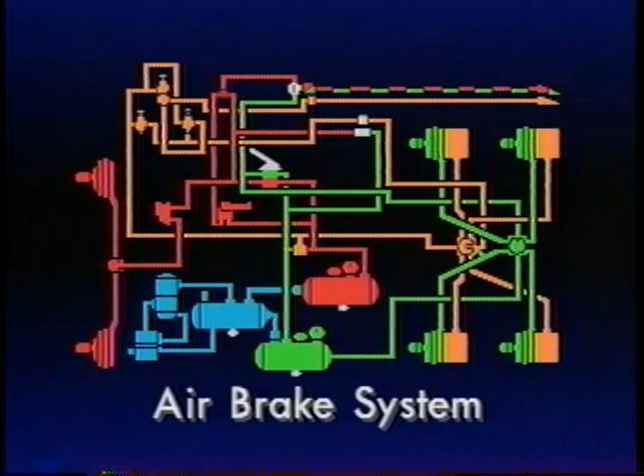No matter what your business is, whether it's hauling materials on high-speed interstates, navigating busy city expressways, or transporting the most valuable cargo of all, people, on crowded city streets, it is your equipment that you rely on to get the job done effectively and safely. It's hard to imagine a more vital part of safe, reliable operation than the air brake systems, and that's what this presentation is all about.

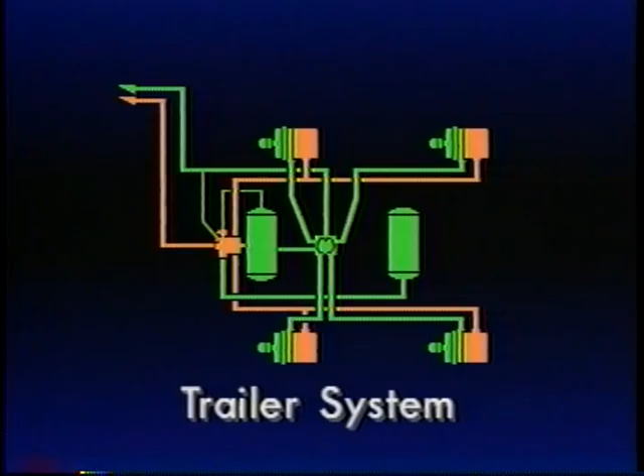A typical air brake system can be divided into several distinct parts: the supply system, the front and rear service systems, and finally, the trailer. This presentation is the first of a four-part series and deals with the operation and maintenance of the air supply system. During the program, we'll point out areas of maintenance concern.

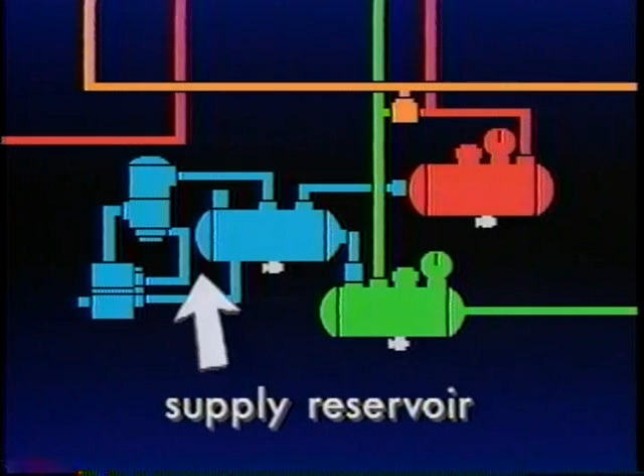Although brake systems and components may vary from vehicle to vehicle, the air supply system, shown here in blue, is basic to all. The major components are the air compressor, supply, front axle, and rear axle service reservoirs, governor, and air dryer.

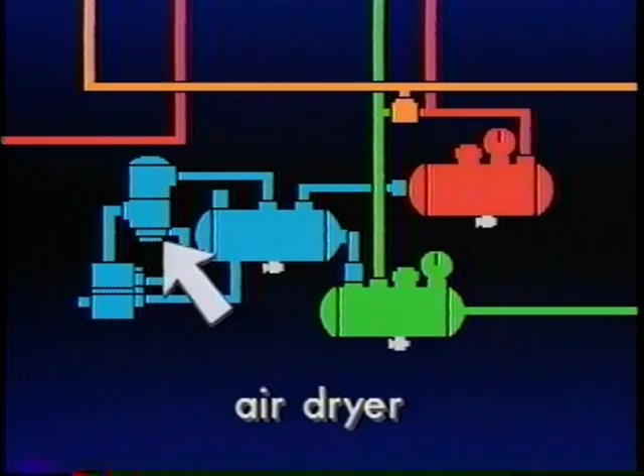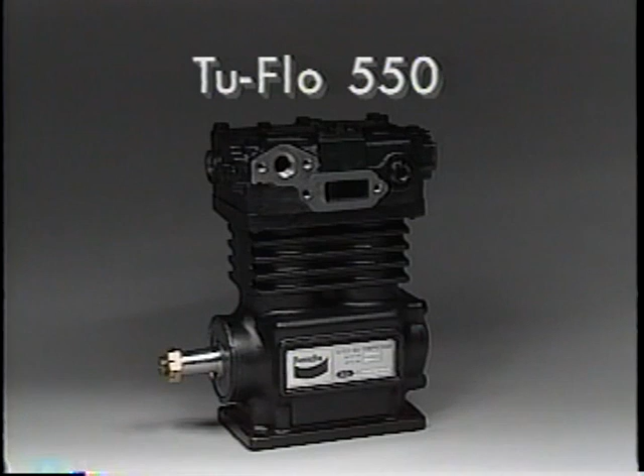The primary component of the supply circuit is an air compressor, such as this Bendix Tu-Flo 550. Powered by the vehicle's engine, the air compressor converts atmospheric air into compressed air, energy needed to power the vehicle's brakes. The compressor components we focus on during this presentation are the crankshaft,

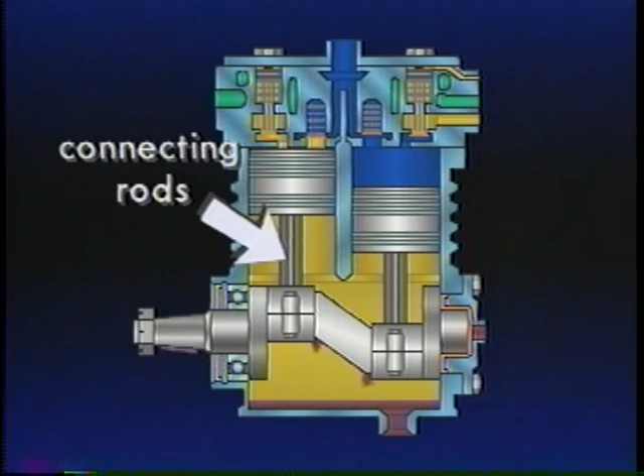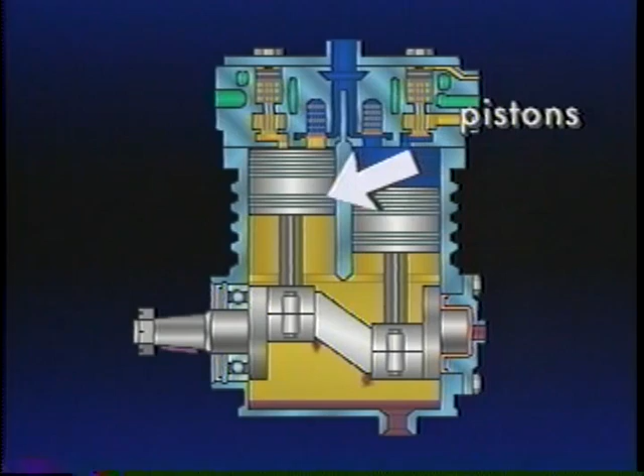connecting rods, rear end cover, rear main bearing journal, pistons, cylinder bore, inlet valve, discharge valve, and discharge port.

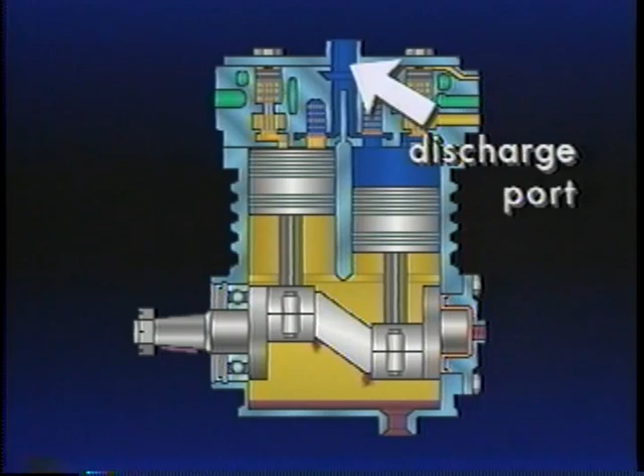The compressor crankshaft and connecting rods convert the rotational force of the engine to a vertical linear force in the compressor pistons. The compressor is lubricated by pressurized engine oil, which in this case enters the rear end cover, flows to the rear main bearing journal, and through a passage in the crankshaft to the connecting rod bearings.

Oil that escapes from around the bearings falls to the bottom of the crankcase and is returned to the engine. This oil return is important because it prevents crankcase flooding, which results in compressor oil passing.

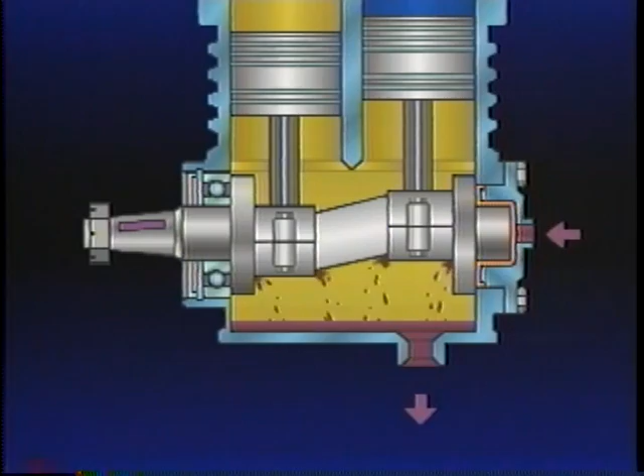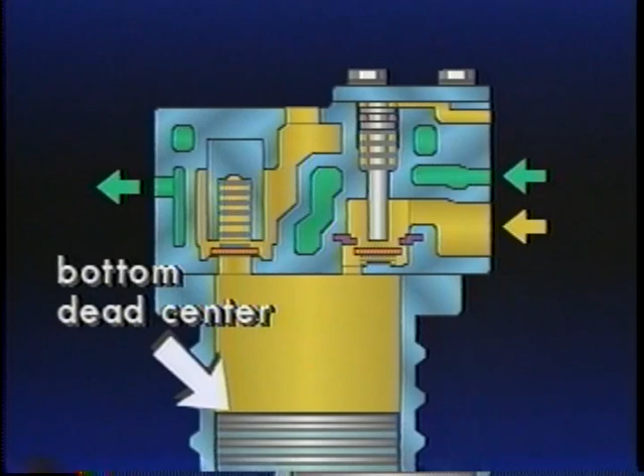Let's take a look at the air compressor from a front view, revealing a single piston only. During the intake stroke, a slight vacuum is created above the piston in the cylinder bore, causing the inlet valve to open and move from its seat. Filtered atmospheric air flows into the bore until the piston reaches bottom dead center and begins to reverse its travel.

As the piston begins its compression stroke, the inlet valve closes, and the air in the cylinder bore is compressed as the piston approaches top dead center. During air compression, the discharge valve opens, allowing compressed air to flow from the cylinder bore past the open valve and out the discharge port into the supply reservoir.

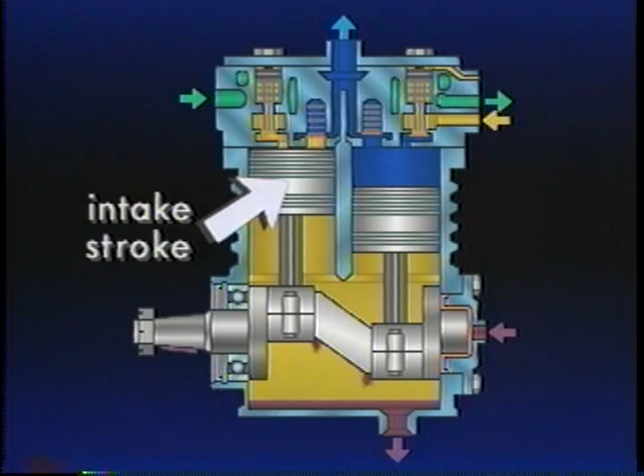Returning to our full cutaway view of the compressor, we find that since the compressor contains two cylinders and the crankshaft has 180-degree opposed journals, one piston will be on its intake stroke while the other is compressing, building to maximum pressure. While this is occurring, a constant flow of engine coolant is routed through the cylinder head cavities to dissipate the heat generated by the compressor during air compression.

Rapid buildup of air pressure depends upon proper opening, closing, and sealing of both the inlet and discharge valving and unobstructed flow of air in the cylinder bores.

Check for any restrictions to the flow of atmospheric air into the cylinder bore or the compressor discharge line leading to the supply reservoir. The obstruction of atmospheric airflow into the cylinder bore will cause the vacuum above the piston to draw oil past the piston rings, resulting in oil passing.

An obstruction in the compressor discharge line leading to the supply reservoir will cause the compressor to run hot, build carbon deposits, and pass oil despite adequate coolant flow.

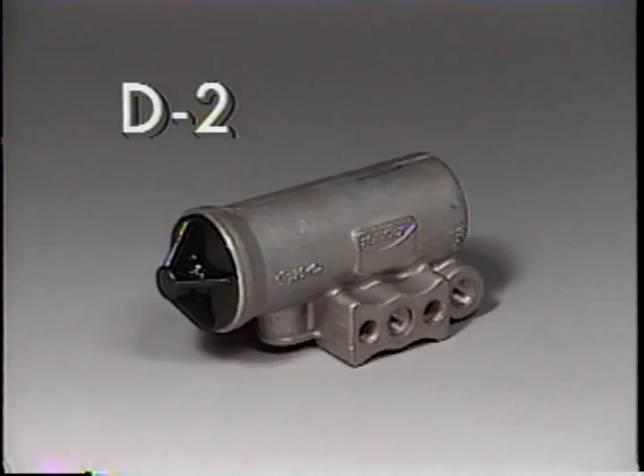Next, let's look at the Bendix D2 governor and how it interacts with the compressor and supply reservoir and later the air dryer. The governor is used to control the compressor and thereby regulate air pressure in the supply reservoir.

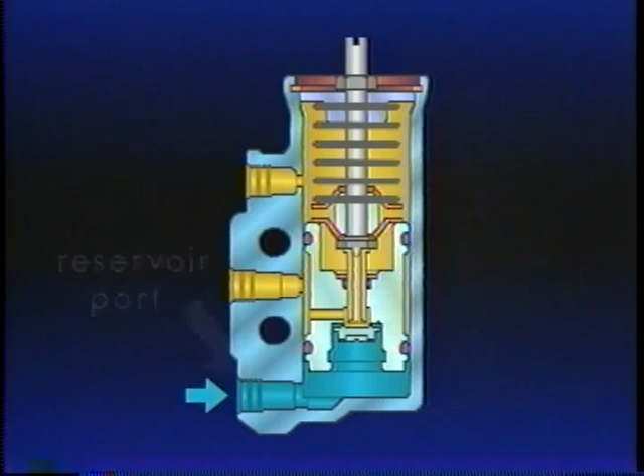The governor's main components are the reservoir port, piston, inlet exhaust valve, pressure setting spring, and governor unloading port.

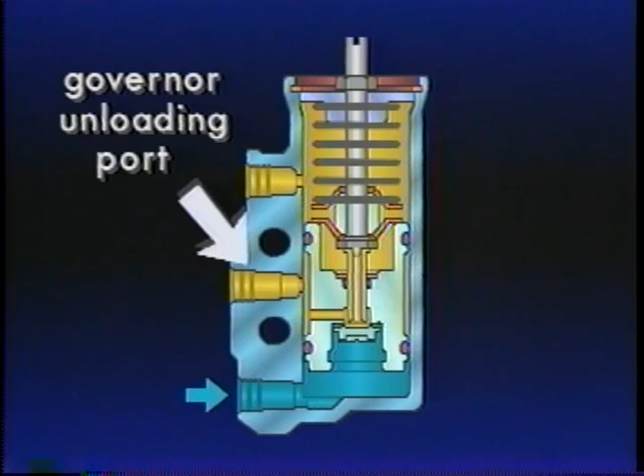An air line connects the governor to the supply reservoir. Reservoir air enters the governor at its reservoir port. As air from the compressor builds reservoir pressure, the governor's piston and valve move together against the resistance of the pressure setting spring. When reservoir pressure reaches the cutout setting of the governor, typically 120 psi, the piston will have moved sufficiently to seal the exhaust and open the inlet.

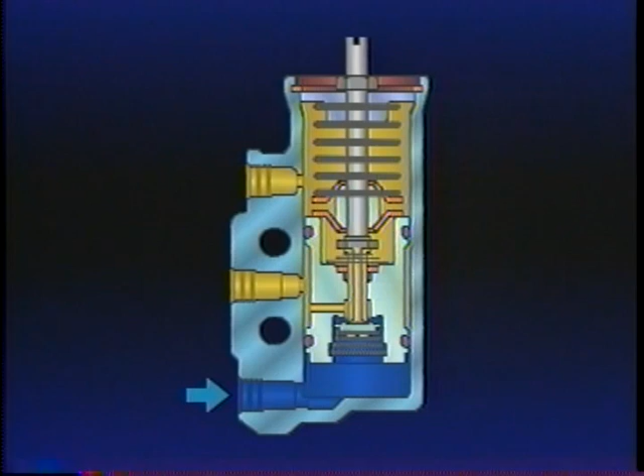Reservoir pressure flows past the inlet, through a passage in the piston, and out the governor unloader port to the compressor unloader mechanism.

Air from the governor enters the compressor and acts upon the unloader pistons, which move and hold the compressor inlet valves off their seats.

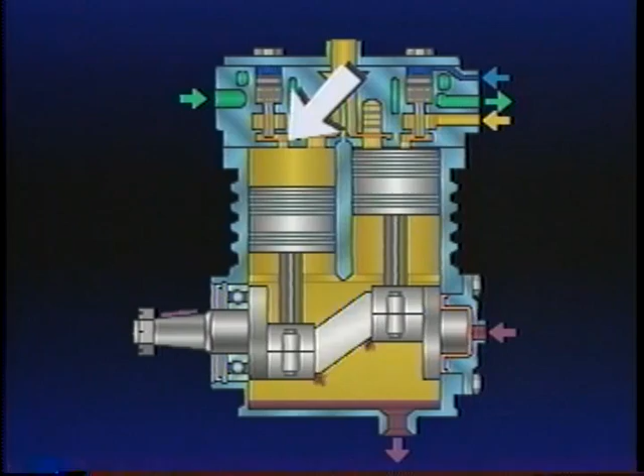With the compressor unloaders pressurized, air enters and leaves the cylinder bores through the open inlets, and air compression ceases. Because the pistons are 180 degrees opposed, air is shuttled from one cylinder to the other as the pistons move up and down.

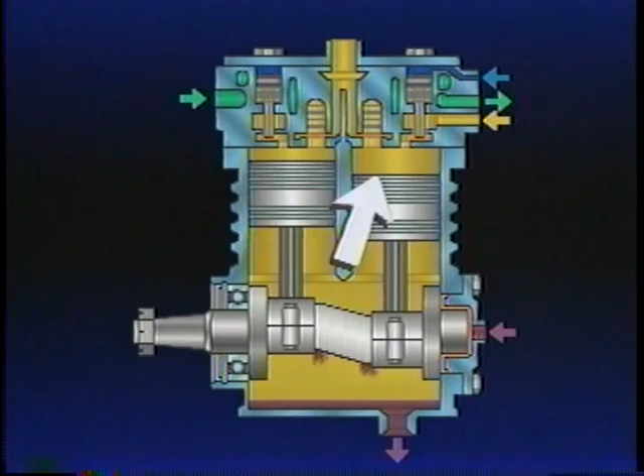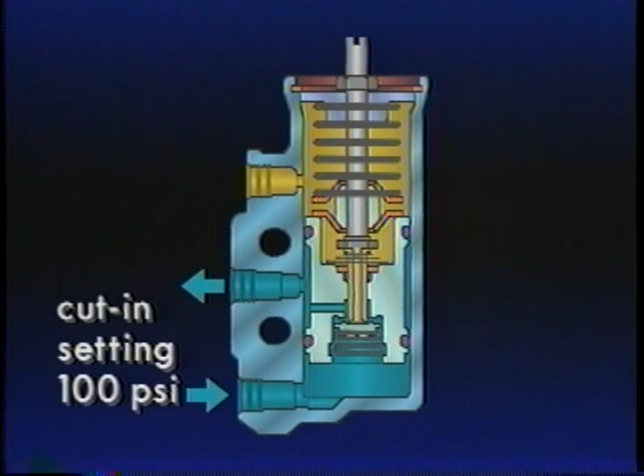When supply reservoir pressure drops to the cut-in pressure of the governor, typically 100 psi, the governor pressure setting spring moves the piston, closing the inlet and opening the exhaust.

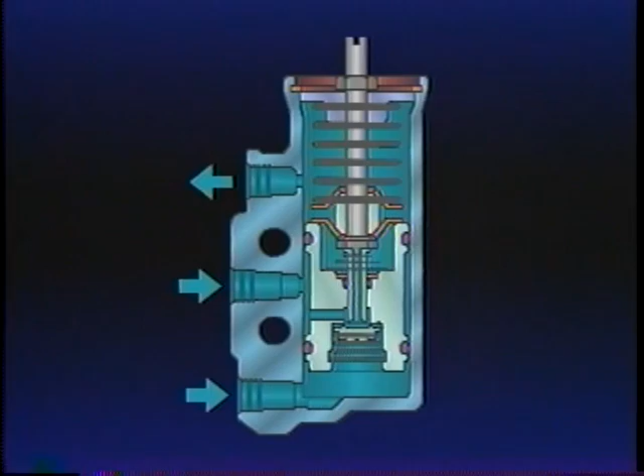Air in the compressor unloader mechanism flows back to the governor and is exhausted. With air pressure removed, springs move the unloader pistons, allowing the inlet valves to return to their seats, and compression of air resumes.

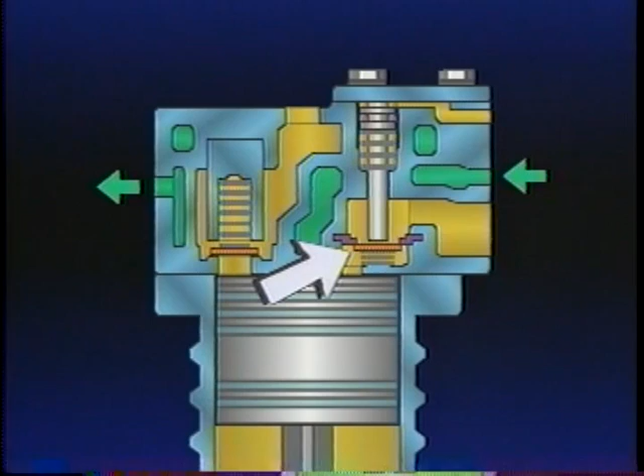Here's a service tip. Make sure the air line between the supply reservoir and governor is unrestricted. Otherwise, the governor's function will be impaired.

If either the governor or compressor unloader mechanism fail to function, the compressor would continue to compress air.

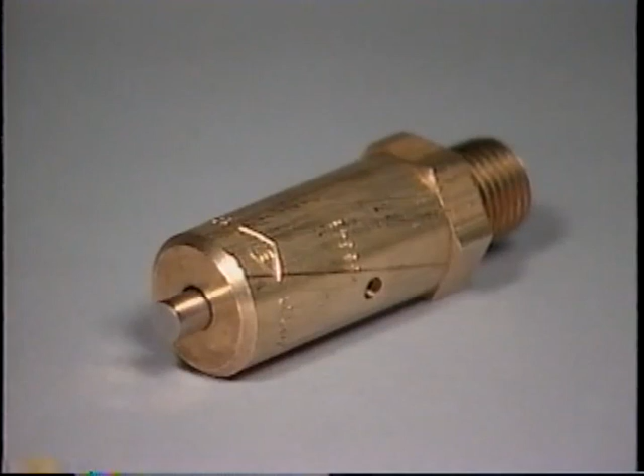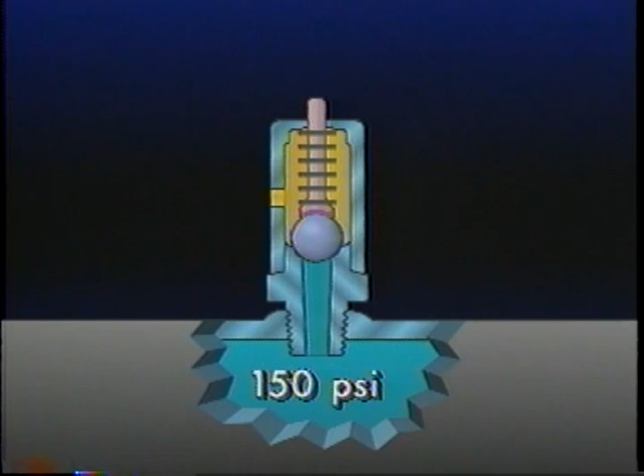To protect the air systems against a failure of either the governor or compressor unloader mechanism, a safety valve like the Bendix ST3 is installed on the supply reservoir or air dryer if the vehicle is so equipped. Generally set to open at 150 psi, the safety valve employs a spring-loaded stem resting on a seated ball valve.

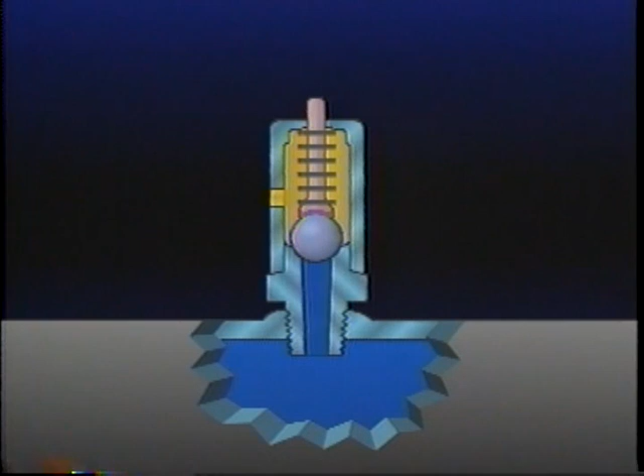When reservoir pressure exceeds the valve setting of 150 psi, the ball moves off its seat and air is exhausted through the exhaust port.

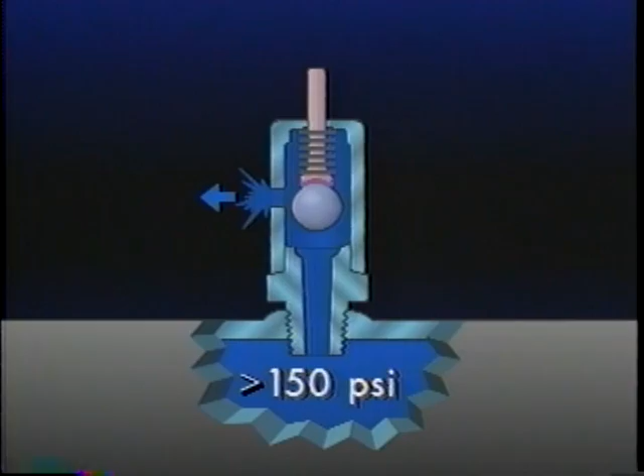The safety valve should be checked periodically by pulling the exposed stem. Air should escape when the stem is pulled and cease when released.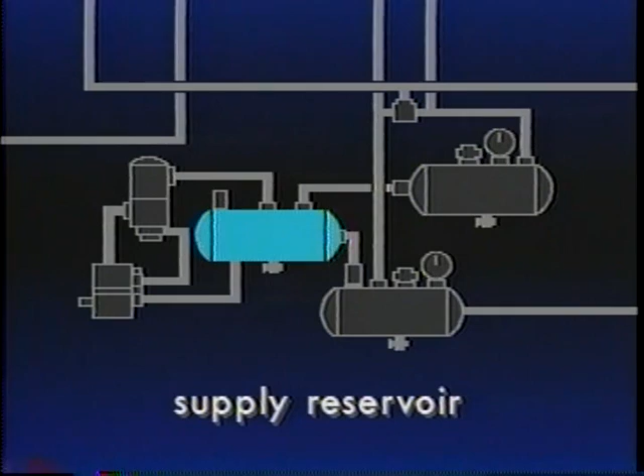A dual circuit brake system generally consists of a minimum of three reservoirs: the supply reservoir, the front axle service reservoir, and the rear axle service reservoir.

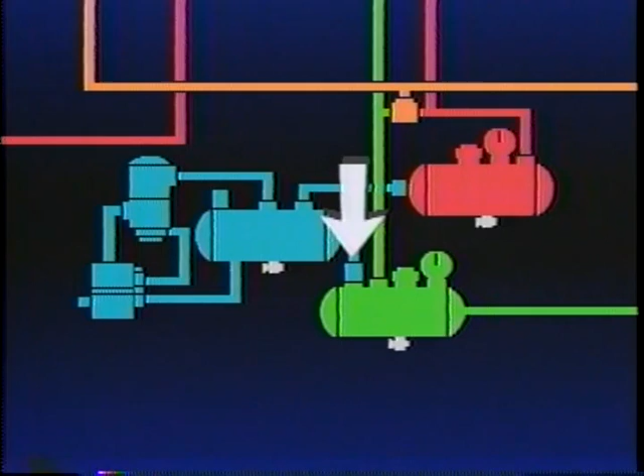The service reservoirs supply both the front and rear axle brake circuits. Air from the supply reservoir flows through single check valves to fill, protect, and separate the service reservoirs from each other.

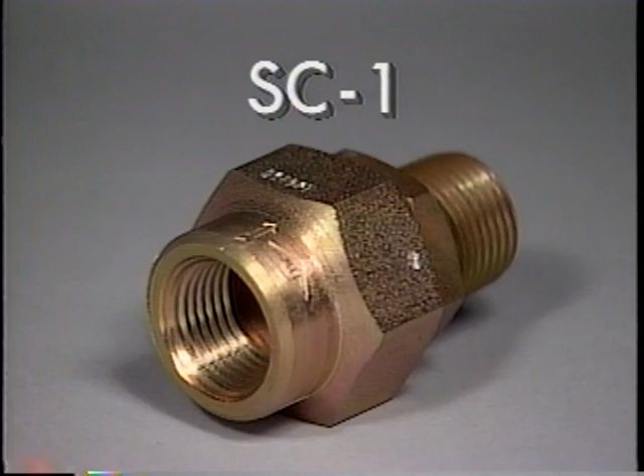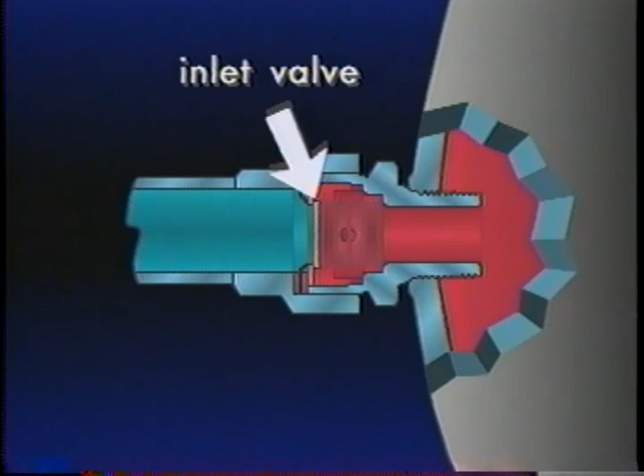The Bendix SC1 single check valve allows air to flow in one direction only. The Bendix SC1 consists of a supply inlet port, inlet valve, spring, valve seat, and delivery port.

Supply reservoir air pressure overcomes a light spring force to move the valve off its seat, allowing air to pass through the valve into the service reservoir.

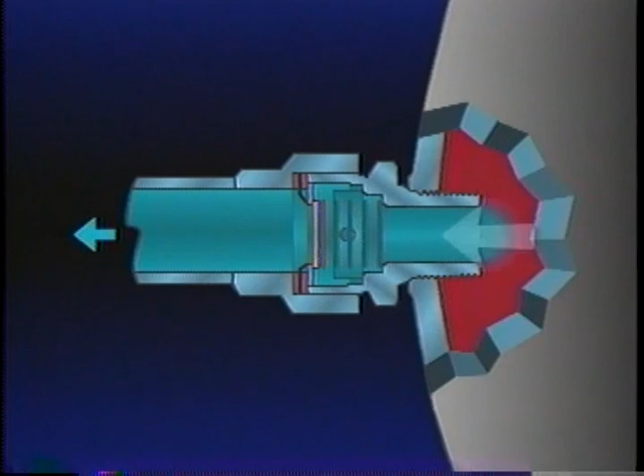If the supply reservoir air pressure is lowered for any reason, the check valve closes and prevents service reservoir air from flowing back into the supply reservoir.

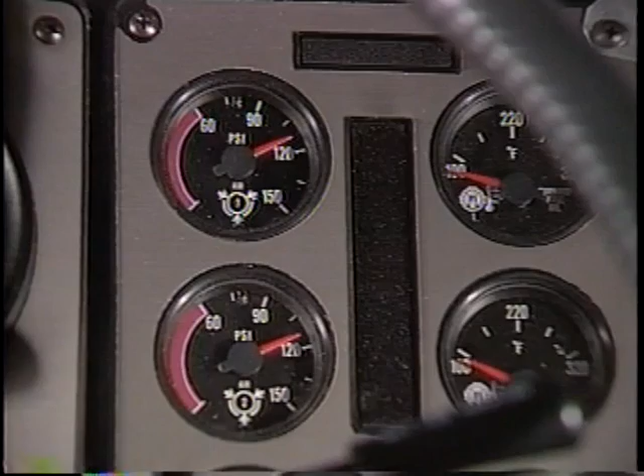As required by federal regulation, braking pressure for each service reservoir is registered on a dash-mounted air pressure gauge or gauges. A low-pressure indicator switch, such as the Bendix LP3, is installed on both service reservoirs.

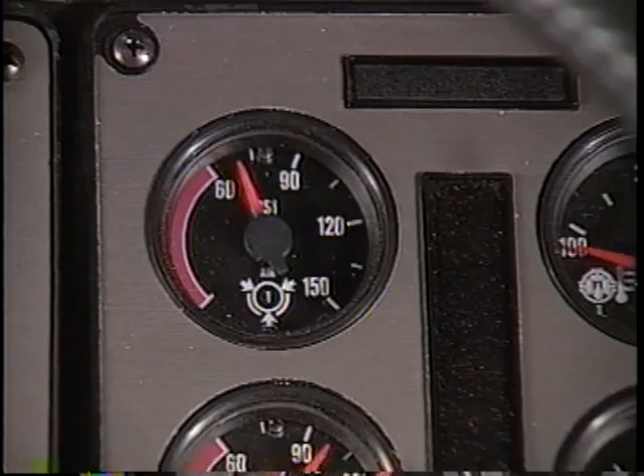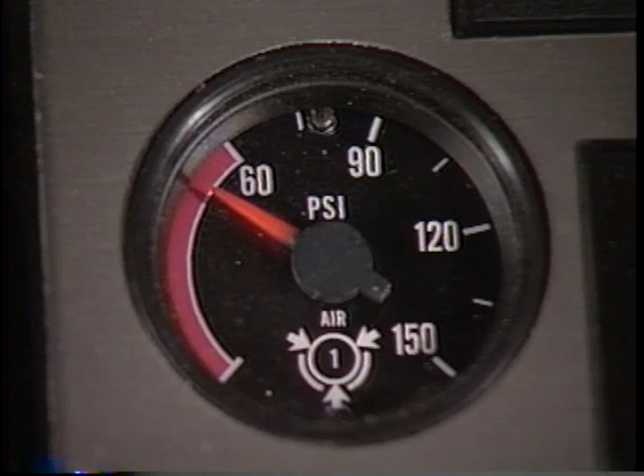Also required by regulation, the LP3 activates a visual warning, generally a dash-mounted warning light and a buzzer, when reservoir pressure falls below a safe minimum, typically 60 psi.

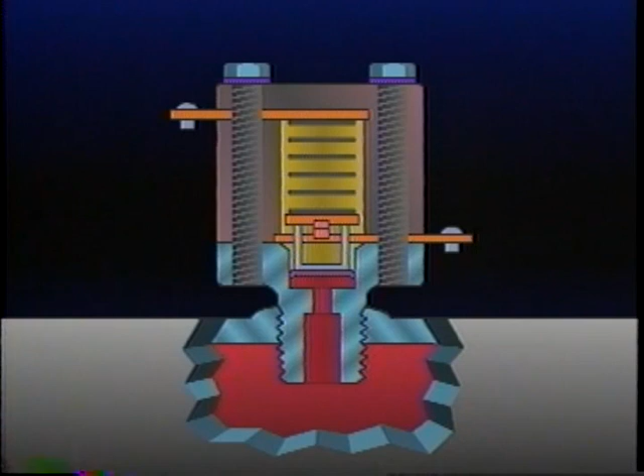Electrical contacts in the low-pressure indicator switch close. They remain closed until reservoir pressure rises approximately 15 psi above its safe minimum setting.

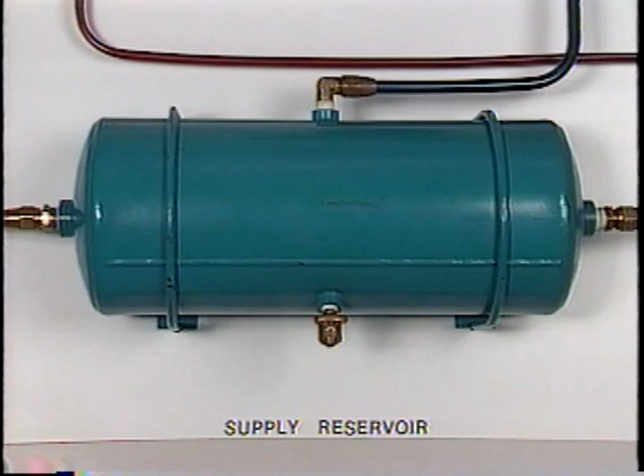In addition to providing a place to store air, the reservoirs also serve as a collection point for contaminants produced during air compression, such as water from the air and oil from the compressor.

Oil, water, and vapor are contained in the hot pressurized air from the compressor. When cooled in the air lines and reservoirs, these contaminants condense and collect in the bottom of the reservoirs.

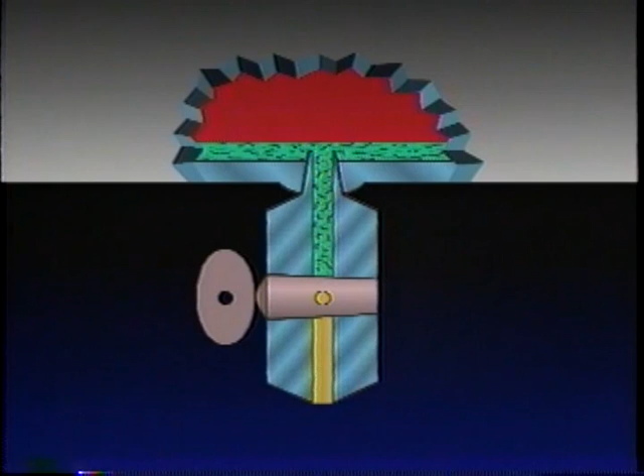Removal of these harmful contaminants is essential to ensuring proper valve operation. This is most easily accomplished using a simple drain cock, which when opened permits air pressure, along with contaminants in the bottom of the reservoir, to be expelled.

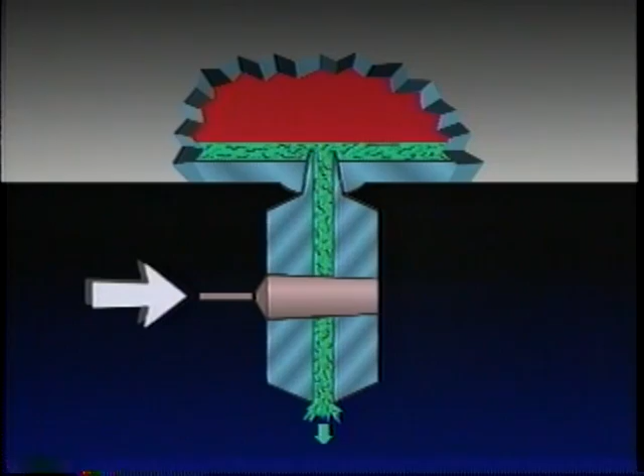The check valves and low-pressure indicator can be tested by observing the reaction of the dash gauges and low-pressure warning device as air is drained from individual reservoirs using the drain cocks.

It should be noted that some vehicle manufacturers install a single low-pressure switch located on the supply reservoir rather than one on each service reservoir.

Although drain devices remove accumulated contaminants from the reservoirs, the air system remains 100% saturated with water vapor, which will condense when the temperature falls.

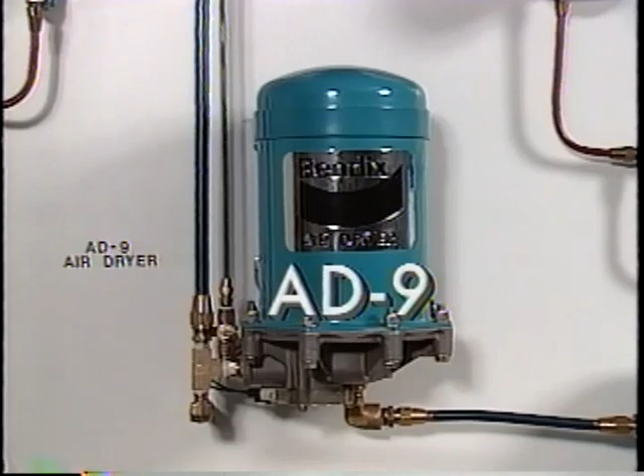To solve this problem, a desiccant air dryer, like this Bendix AD-9, is installed to remove 100% of the liquid and solid contaminants and approximately 95% of the water vapor prior to entering the brake system.

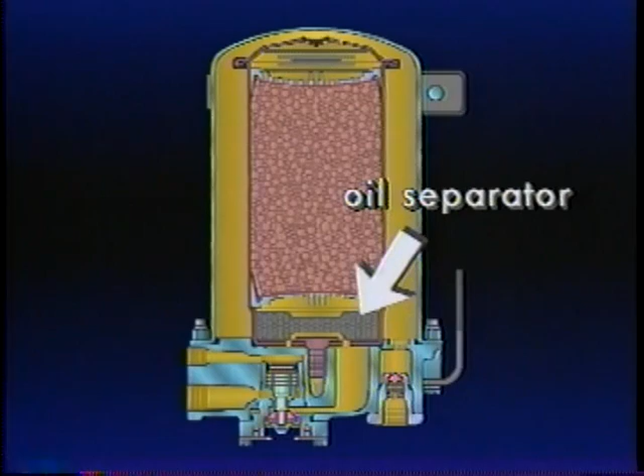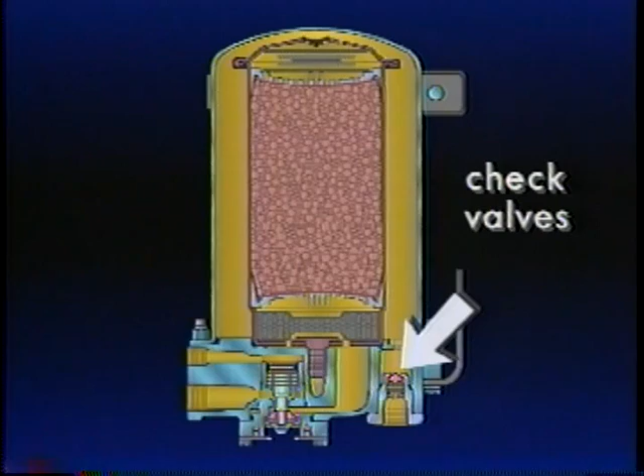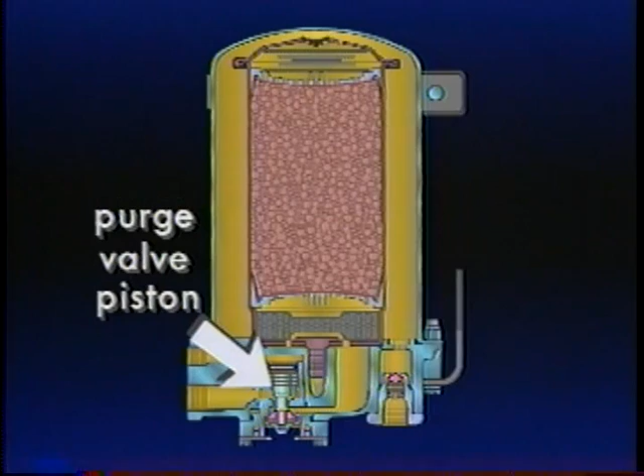Before we take a closer look at the air dryer's role, let's examine its main components. The air dryer includes the supply port, end cover, sump, oil separator, desiccant cartridge, desiccant drying bed, check valves, outer shell, delivery port, control port, purge valve piston, purge valve, turbo cutoff valve, and exhaust port.

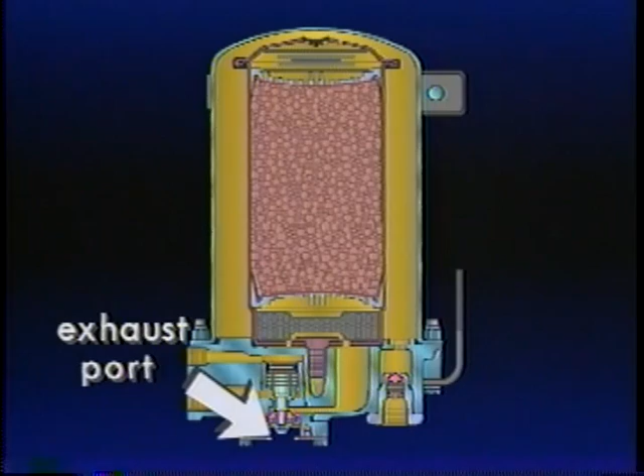The air dryer is installed in the discharge line between the compressor and the supply reservoir, and also interacts with the governor.

Air and contaminants from the compressor enter the air dryer supply port in the end cover. Air traveling through the end cover cools, causing some contaminants to condense and drop to the sump of the end cover.

Upon exiting the end cover, air enters the oil separator, where the remaining solid and liquid contaminants are removed. Still saturated with 100% water vapor, air flows from the oil separator to the desiccant cartridge.

Air flowing through the desiccant drying bed becomes progressively drier as the water vapor adheres to the desiccant material in a process known as adsorption.

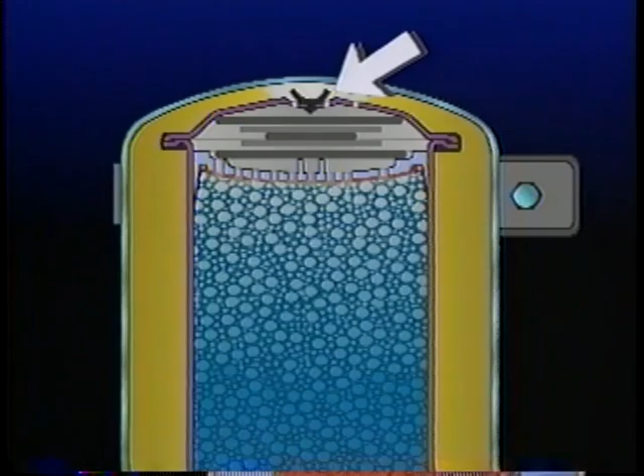While some air will flow through the orifice adjacent to the check valve, the majority of the dry air exits the desiccant cartridge through its integral check valve to fill the purge volume between the desiccant cartridge and outer shell.

Dry air in the purge volume flows toward the end cover and passes through the single check valve, out the delivery port, and to the supply reservoir.

The air dryer will remain in the charge cycle until air brake system pressure reaches the governor cutout setting of 120 psi.

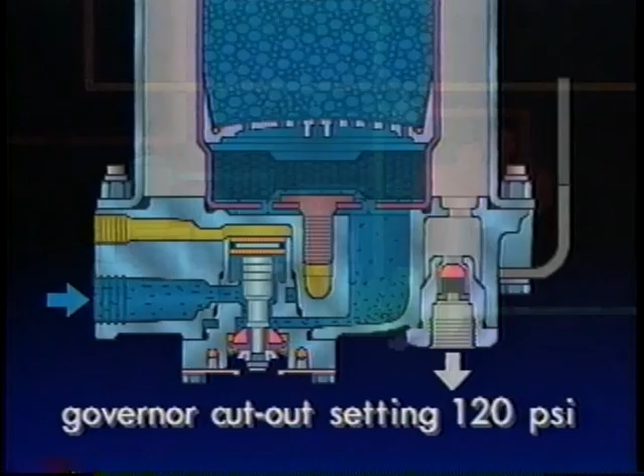The same signal of air from the governor which causes the compressor to unload also starts the air dryer purge cycle.

Air from the governor enters the control port of the air dryer, moving the purge valve piston.

The turbo cutoff seals the inlet port and opens the purge valve.

Contaminants in the end cover sump are expelled from the open purge valve. To protect the supply reservoir against air loss, the check valve closes.

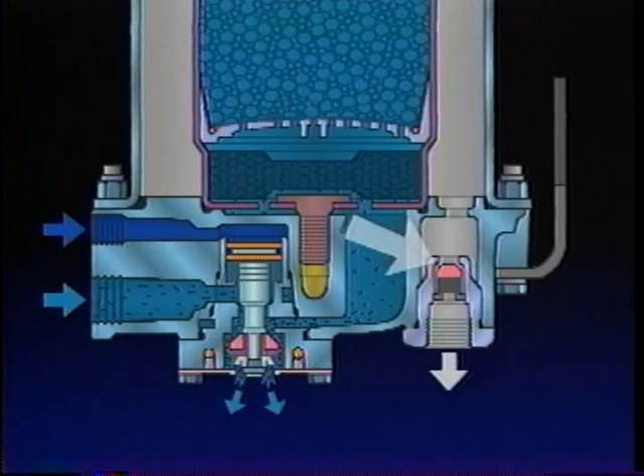At the same time, air in the purge volume and air passing through the desiccant cartridge reverse direction as the purge valve is opened.

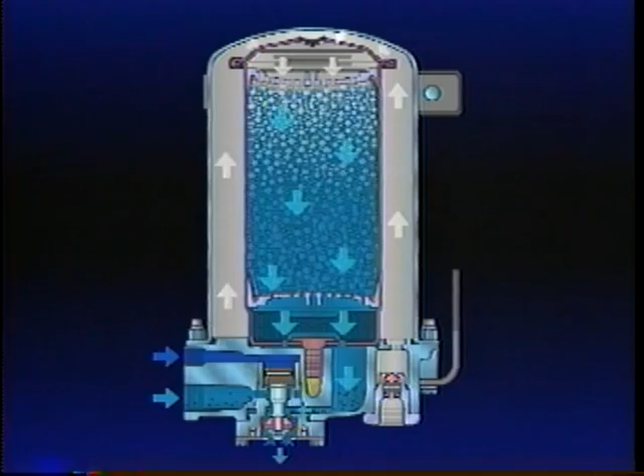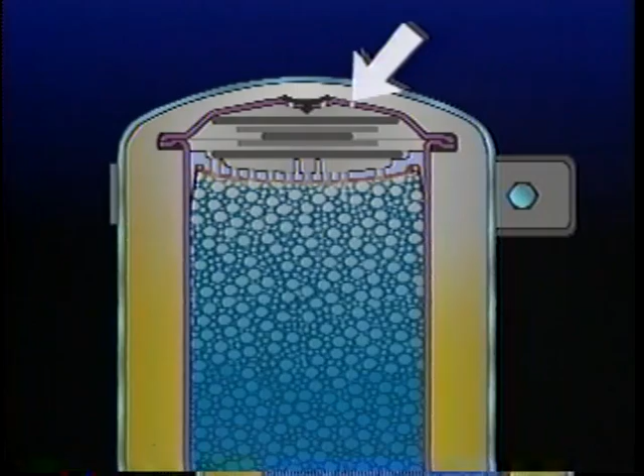Air from the purge volume passes through the orifice adjacent to the check valve and expands to near 0 psi, becoming super dry before flowing into the desiccant cartridge.

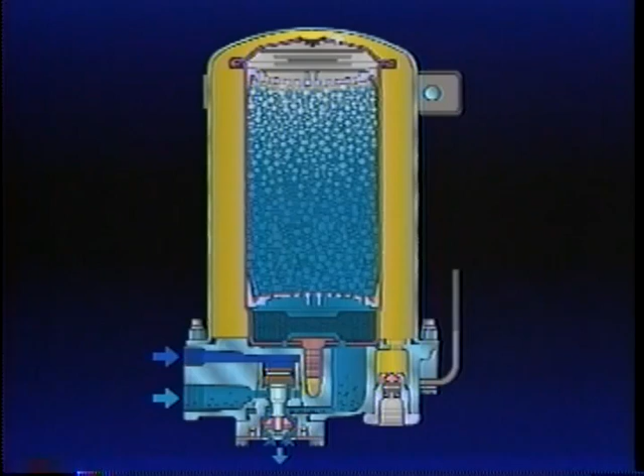This super dry air regenerates the desiccant material by stripping away accumulated water vapor. Contaminants in the oil separator are also carried away through the open purge valve.

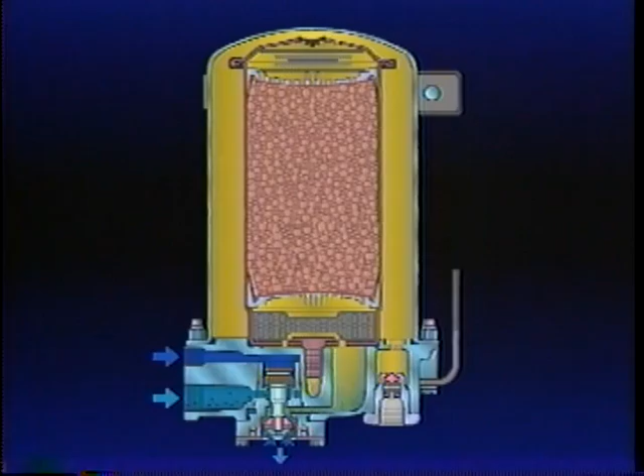Closing the dryer inlet port during the purge cycle ensures that loss of engine turbocharger pressure is minimized in the event the compressor intake is connected to the turbo. The entire purge cycle is complete in about 25 seconds.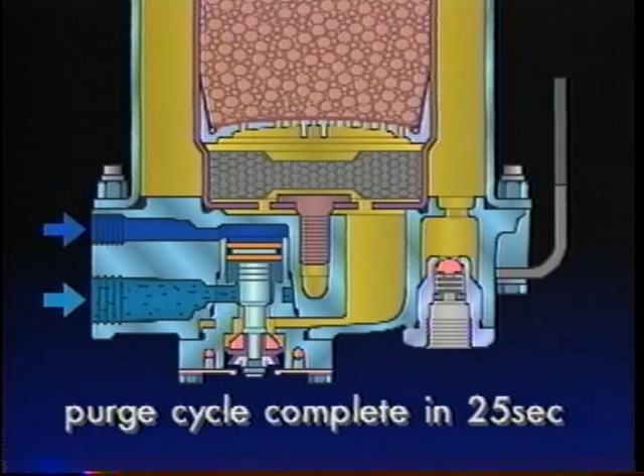The purge valve will remain open until air brake system pressure is reduced to the governor cut-in setting of 100 psi.

When the governor exhausts air from the compressor unloaders, air is also removed from the air dryer purge piston. With control pressure removed, the piston moves in response to its spring and closes the purge valve. The charge cycle repeats.

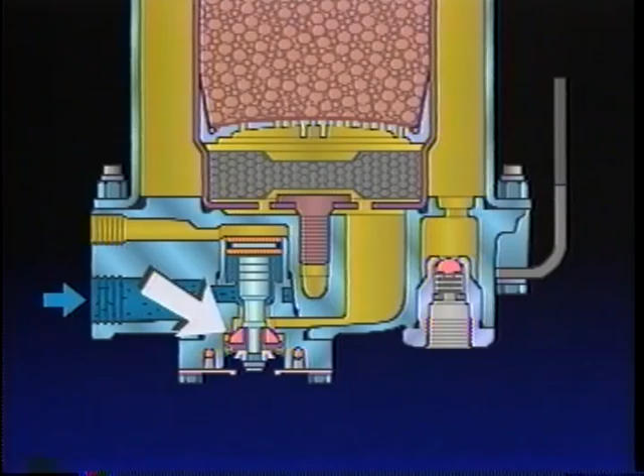Since the air dryer is controlled by the governor, which in turn reacts to supply reservoir pressure, it is important that air leakage in the supply reservoir be minimized for proper air dryer operation.

Leakage in the supply reservoir will result in the compressor cycling between loaded and unloaded, causing the air dryer to alternate between the charge and purge cycle.

It must be remembered that air loss in the supply reservoir only will not be registered on the dash gauges because of the single check valves that protect the service reservoirs.

With the addition of the air dryer, the air supply system is complete. But before we close, let's quickly review what we've discussed during this presentation.

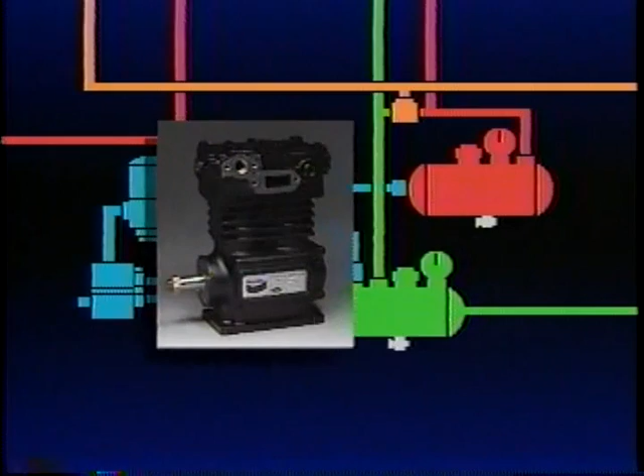The air compressor is the heart of the system. Driven by the engine, it produces and transmits compressed air to the supply reservoir.

The governor connected to the compressor, air dryer, and supply reservoir maintains system pressure between a preset minimum and maximum by controlling the compression cycles of the compressor.

From the supply reservoir, air flows into the service reservoirs, which are separated and protected by single check valves. Each reservoir in the system is equipped with a drain cock to drain away accumulated contaminants.

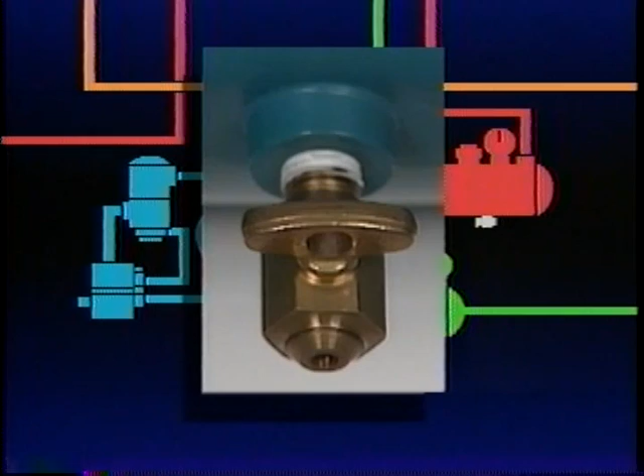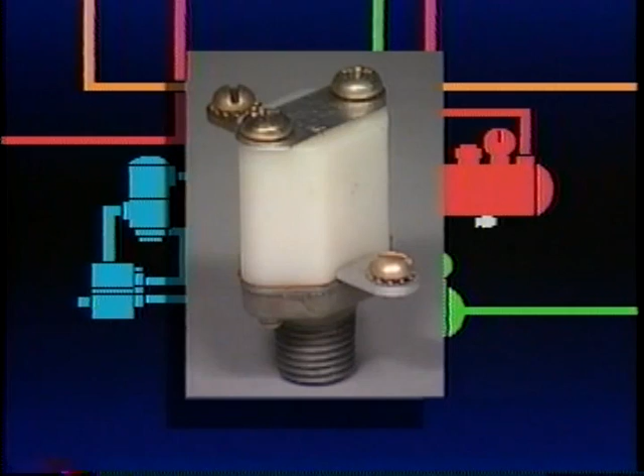With an air dryer installed, contaminants are eliminated before they can enter the system. Finally, low-pressure indicator switches and dash gauges keep the operator apprised of available brake system pressure.

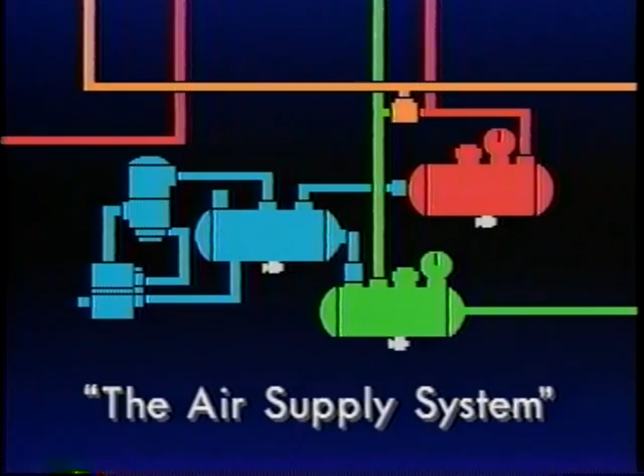We hope this detailed look at your air supply system and its components has enhanced your understanding of the air brake system. Part 2 will discuss the operation and maintenance of the service brake system.